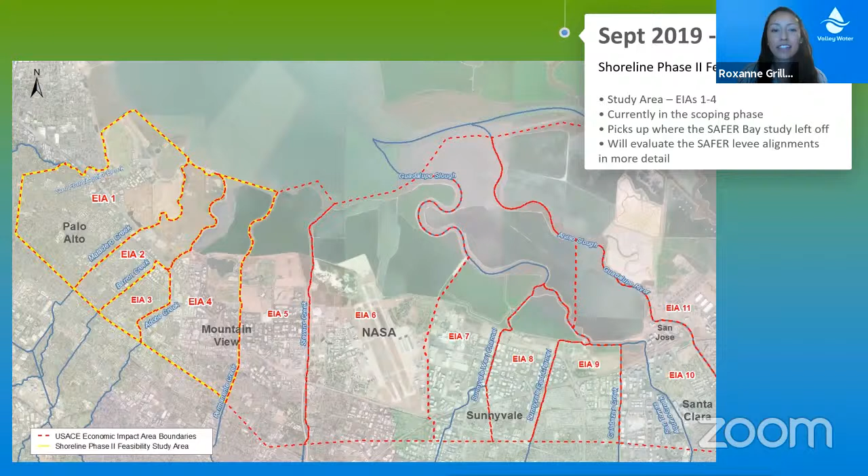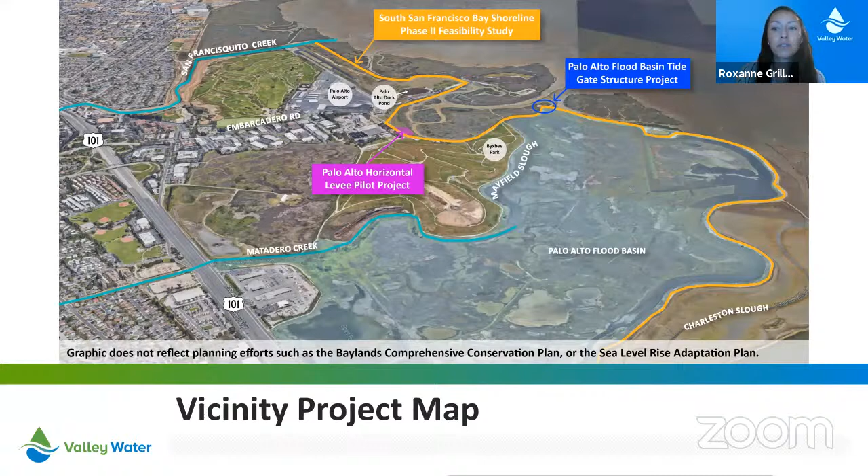So again, this is just to help orient ourselves. The phase 2 feasibility study project area runs along the Palo Alto shoreline north of Highway 101. There are a number of structures and key infrastructure located in this area, including the Palo Alto Airport and the Palo Alto Regional Water Quality Control Plant.

The U.S. Army Corps of Engineers is the federal lead agency of the Shoreline Phase 2 feasibility study. In general, Corps feasibility studies are cost shared with the sponsor. The study non-federal sponsors are Valley Water and the California State Coastal Conservancy. Study sponsors pay 50% of the cost of the study, while the U.S. Army Corps of Engineers pays for the other 50%.

Lastly, the city of Palo Alto is a vital local partner for the study. The city shares its knowledge and experience of the project area, local conditions, and environment and habitat, and design and maintenance issues related to the project alternatives under consideration.

The Shoreline Phase 2 feasibility study is a dual purpose project. The main purposes are to provide coastal storm risk management as well as opportunities for ecosystem restoration.

The specific coastal storm risk management study objectives are to reduce risk to human life, health, and safety caused by coastal flooding and sea level rise, reduce economic damage from coastal flooding to the community, and reduce flood risks in a manner that maintains or improves the ecological function of the baylands by implementing nature-based flood protection solutions.

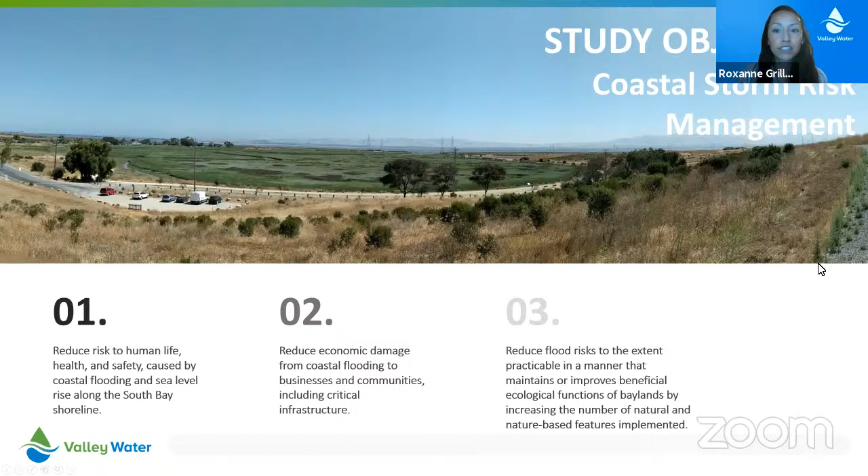The project-specific ecosystem restoration objectives are to restore ecological function and habitat for native plant and animal species, reduce risk to baylands from coastal flooding and sea level rise, and to the extent practicable, implement measures that increase public access to the shoreline. All of the proposed project alternatives for the Shoreline Phase 2 feasibility study should stay within the study constraints listed here.

Specifically, the project should not affect critical infrastructure or increase flood risk. The project should avoid impacts to other restoration projects in the bay and avoid reducing recreational access opportunities.

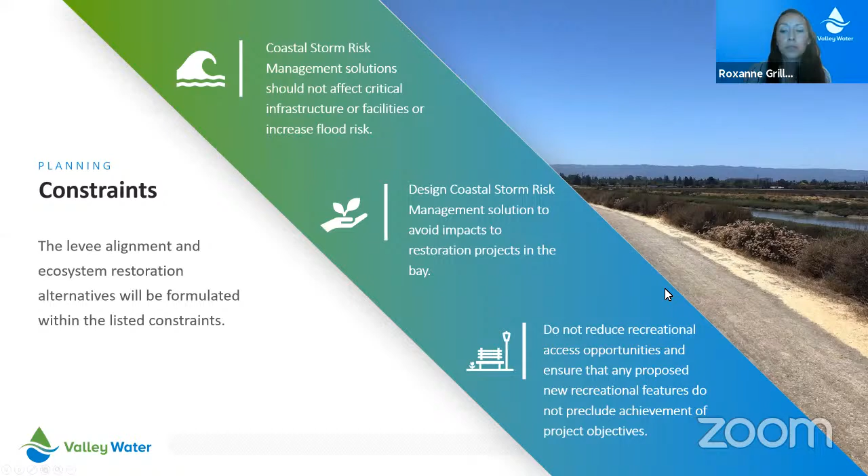Now I want to talk a little bit about the feasibility study process. The Shoreline Phase 2 feasibility study will follow the U.S. Army Corps of Engineers' formal feasibility study process. This chart lists the key study milestones and products that will be produced as a part of this process.

As I already mentioned, the study partners kicked off the project in September of last year. The first Phase 2 feasibility study milestone was the alternatives milestone, achieved in January of this year. During the alternatives milestone, the study partners agreed on the overall objectives and constraints of the study, which I just went over, and they also agreed on the criteria that will be used to evaluate and compare the alternatives to select one recommended plan.

The next upcoming milestone we're looking forward to is the tentatively selected plan milestone, scheduled for spring of 2021. At this milestone, the study partners will agree on one recommended project alternative to move forward with more detailed engineering and cost design.

Between now and the tentatively selected plan milestone, the study partners will develop project alternatives, develop ecosystem restoration options, as well as a bunch of different levee alignments, and then investigate the engineering feasibility, economic justification, and environmental acceptability of these levee alignments and ecosystem restoration alternatives.

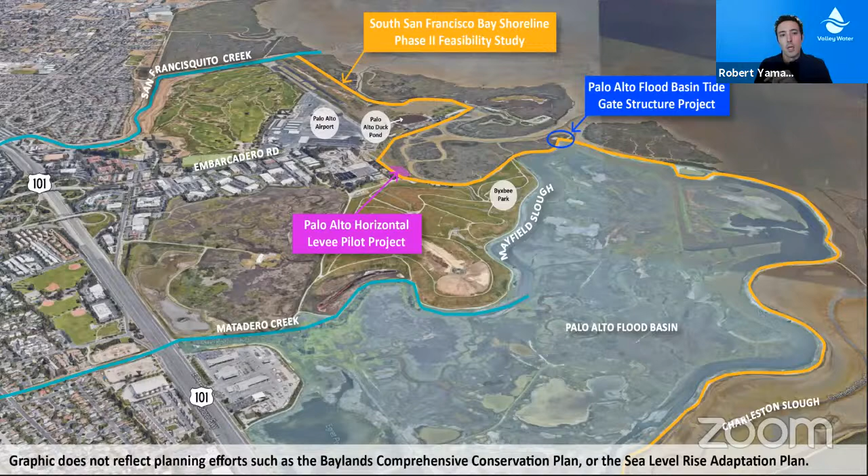So what the Palo Alto flood basin does is it basically provides the storage capacity. It's like a giant bathtub, providing storage capacity for large storm events. So you have a 100-year statistic, 100-year storm event, and it provides the capacity for all the water running through the creeks to store into the Palo Alto flood basin to prevent overtopping of the creeks.

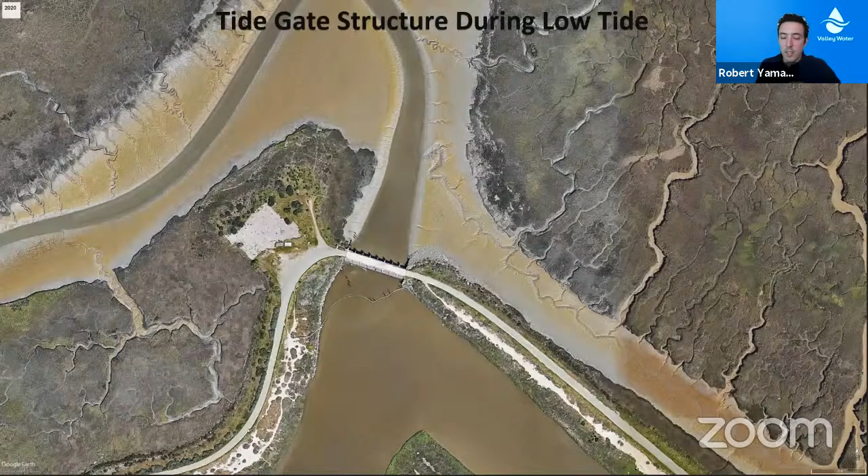Here's an aerial shot just showing you the existing tide gate structure during a high tide, and that same shot during a low tide, and the water level in the basin is the same. This is all taken during the summer, but you can see there's quite a big difference in the sea level between high tide and low tide.

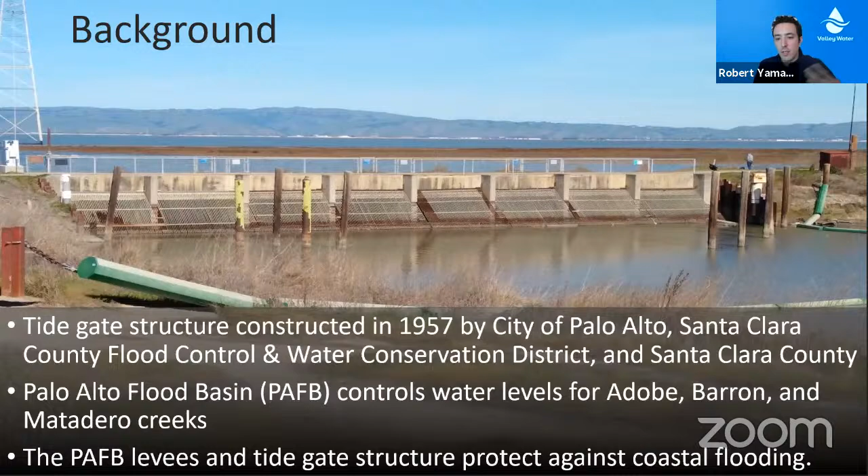Just a quick background: the existing structure was constructed back in 1957 by the City of Palo Alto, the Santa Clara County Flood Control and Water Conservation District, which is now Valley Water, and Santa Clara County. As we talked about, the Palo Alto flood basin controls the starting surface water level elevations for Adobe, Barron, and Matadero Creeks, and the tide gate structure, combined with the levees, provides coastal flood protection.

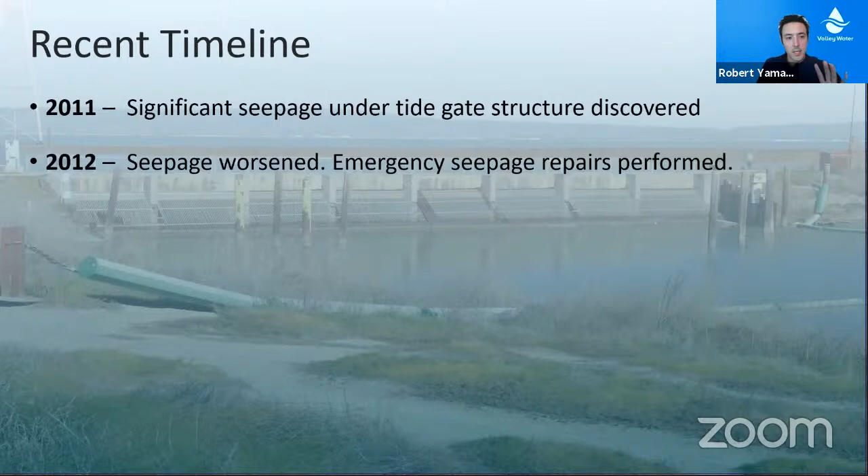A more recent timeline: back in 2011, significant seepage was discovered underneath the structure, and in 2012 that seepage worsened, and Valley Water performed emergency repairs to stop it. Then in 2017, Valley Water attempted concrete repairs to lengthen the service life of the existing structure, but the contractor wasn't able to complete construction because of additional damage found, and they were unable to dewater the work site. Upon further review, it was determined that it's better to replace the structure rather than repair it.

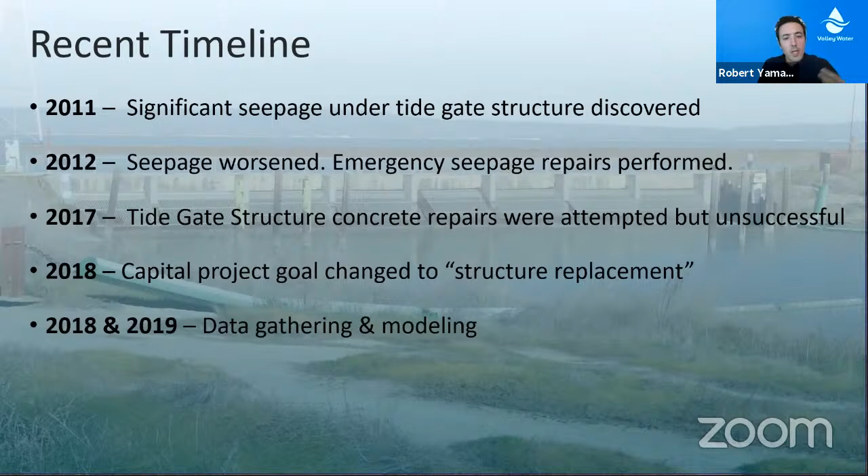So in 2018, the goal changed to a replacement structure, and we've been doing a lot of data gathering and modeling to support this replacement structure. Currently we're ongoing with preliminary design.

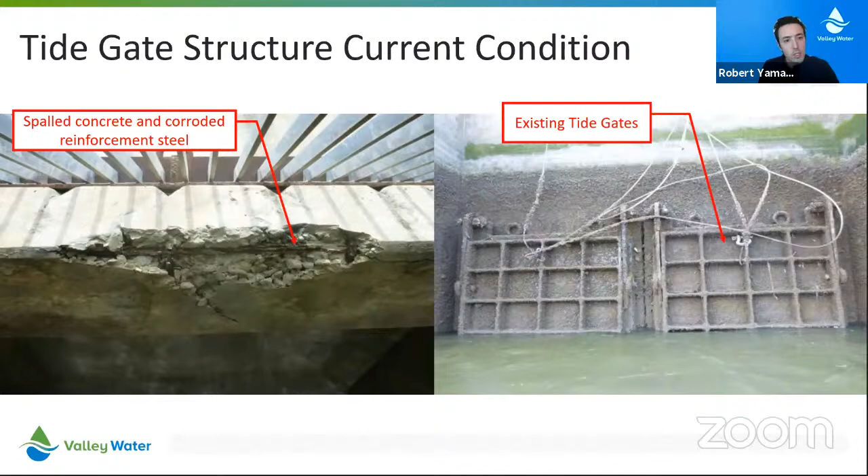Here's some pictures just showing what the existing structure looks like if you were to get underneath and look at it. There's a lot of spalled concrete, exposed rebar, and weathered tide gates. Even on the top, you can see spalled concrete and exposed rebar. It's in a marine environment, and this is kind of typical of the age of this structure, and it's time to be replaced.

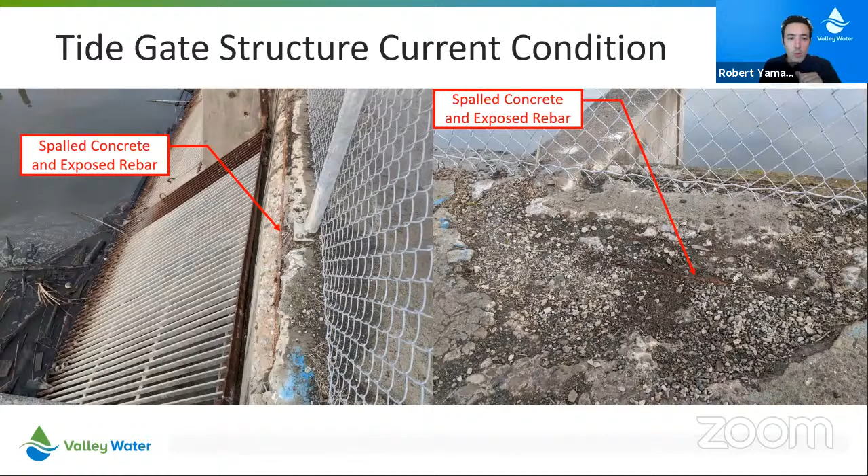So the existing structure is a 63-year-old structure. It's got some structural and hydraulic deficiencies, and maintenance is becoming more and more problematic and costly. It has some seismic vulnerabilities. It's founded on timber piles. There's some potentially liquefiable soils. There's leaky tide gates. As you saw, there's spalled concrete and corroded steel reinforcement.

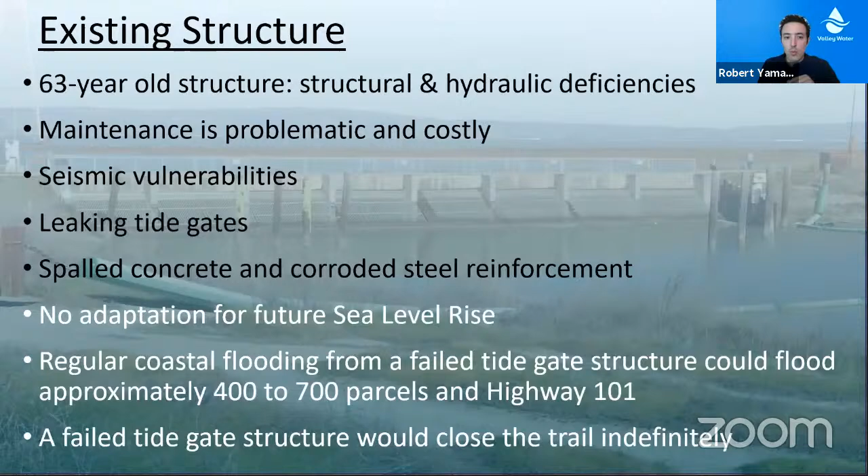There's no adaptation for future sea level rise, and regular coastal flooding from a failed tide gate structure could potentially flood 400 to 700 parcels and Highway 101, and we don't want to let that happen, and that's why we're replacing the structure. Also want to note that a failed tide gate structure would close the trail down indefinitely.

So with the proposed replacement tide gate structure, we'd see continued coastal and creek flood protection, continued protection of the existing basin habitat. Construction's anticipated to take about 4 years, and that construction's only occurring over a 5-month window each year between September 1st and January 31st, to protect the California Ridgway's rail breeding season. It would accommodate roughly 2 feet of future sea level rise, and a temporary trail closure is estimated about 35 months.

Also want to note that the new tide gate structure is going to be about 5 feet higher than the existing structure. And the new tide gates and sluice gate will be more efficient than the existing gates. It'll have improved operations and maintenance, and fewer maintenance required. And the current preliminary cost estimate is around $33 million or more.

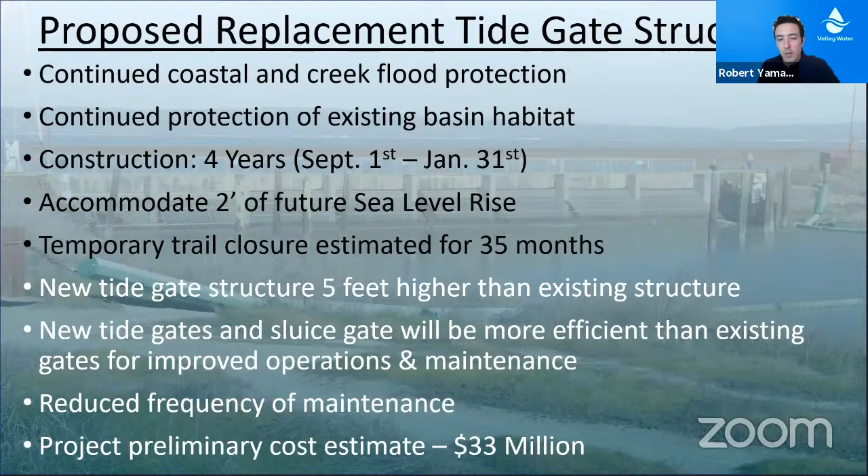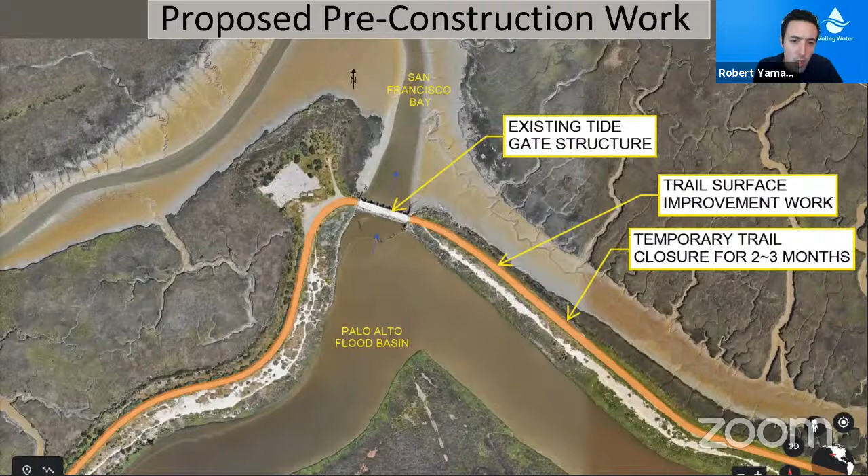These next slides, I'm going to go through a little quick. It just shows the construction staging proposed. And the big takeaway from this is kind of why - just showing the difficulties in constructing this project. We're out here, we've got a sensitive habitat.

You've got the Palo Alto flood basin on one side, you've got the San Francisco Bay on the other. We're out here in the water. Everything has to be dewatered to construct. And most importantly, we're constructing only in a 5-month window where there's also a rainy season involved in there.

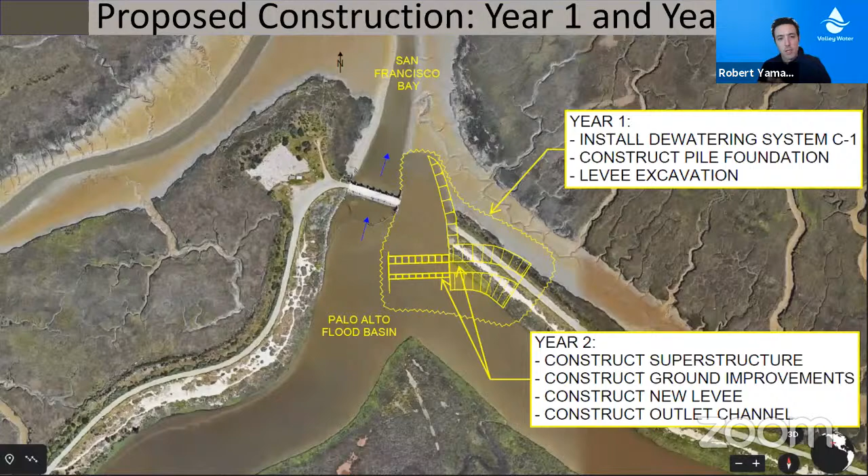The big takeaway here is that we have to construct a new structure first. And then once the new structure is put into service, the existing structure is removed. So there's going to be continued flood protection throughout construction.

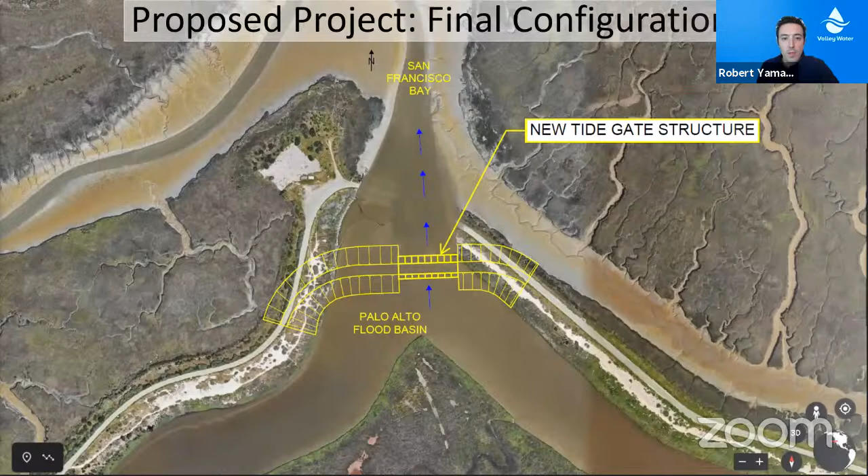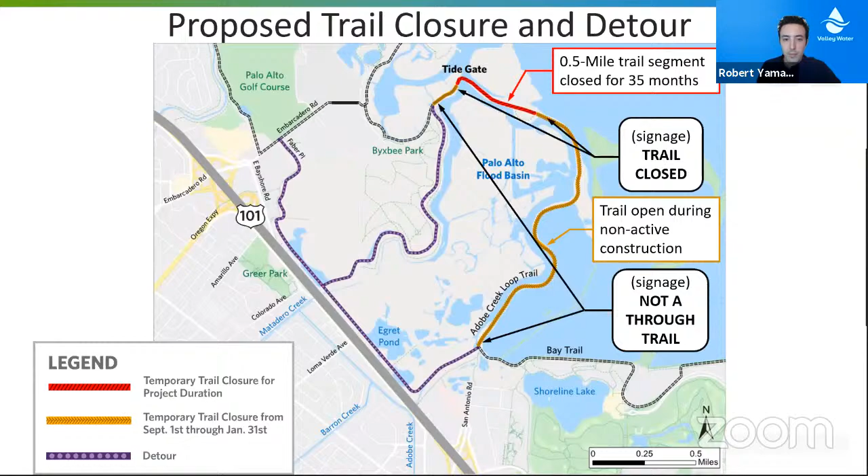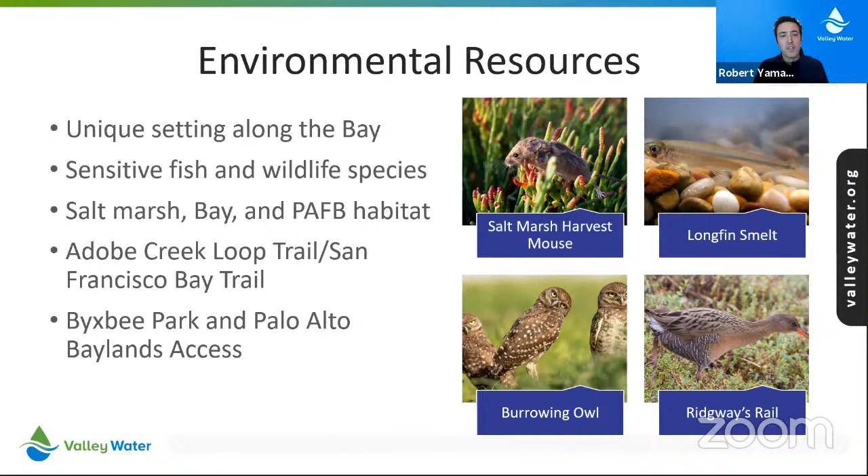We've got Adobe Creek Loop Trail, which is part of the San Francisco Bay Trail. So we've got recreation, Byxbee Park, Palo Alto Baylands access. Many considerations going into the development of this project and part of the permitting and our partnerships with all of our stakeholders. Want to note that our CEQA - first of all, we have every permit under the sun that we're dealing with.

But our CEQA is planned to be a mitigated negative declaration, also known as a CEQA MND. And it's actually probably going to be posted this coming Monday. So I'll get to it where you can sign up to make sure you're notified of where to view that and how to view that.

Right after this slide, just a quick tentative target project schedule. We've just completed the planning phase this summer. The draft CEQA MND will be released for public comment probably on Monday. We anticipate completing 100% design and obtaining environmental permits by summer, fall 2021 next year. There'll be some proposed levee trail surface improvement work also performed later next year, with the main construction for the replacement tide gate structure starting fall 2022 and completed by fall/winter 2025.

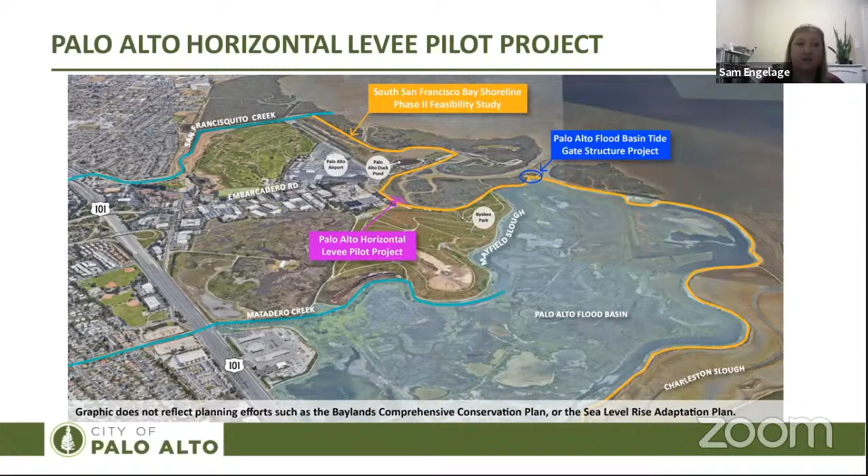Some project drivers have already been covered by Valley Water staff in their earlier presentation, so I'll keep this high level. But the key drivers include the current state of the flood control levees surrounding Palo Alto. Right now they're not engineered to meet FEMA accreditation standards, and we experience overtopping especially when king tide events occur alongside storm events. That's led us to participate in flood control levee improvement projects, namely Safer Bay and the South San Francisco Bay Shoreline project heard previously in the webinar. Those projects enable the city to think outside the box and see if we can include green infrastructure into those larger levee improvement projects. That's where this project fits in.

Another project driver includes the acknowledgement from many resource agencies statewide that transition zones between terrestrial and tidal habitats are severely constrained and developed, specifically by the steep artificial faces of traditional levees. This is Bay-wide, not a Palo Alto specific concern. That acknowledgement that these transition zones are constrained and in need of additional restoration has made them a priority for resource agencies. Because of that, agencies like Palo Alto can apply grant funding toward interesting, slightly novel green infrastructure projects to incorporate more green infrastructure into flood control levee improvement projects, while helping resource agencies restore these transition zones.

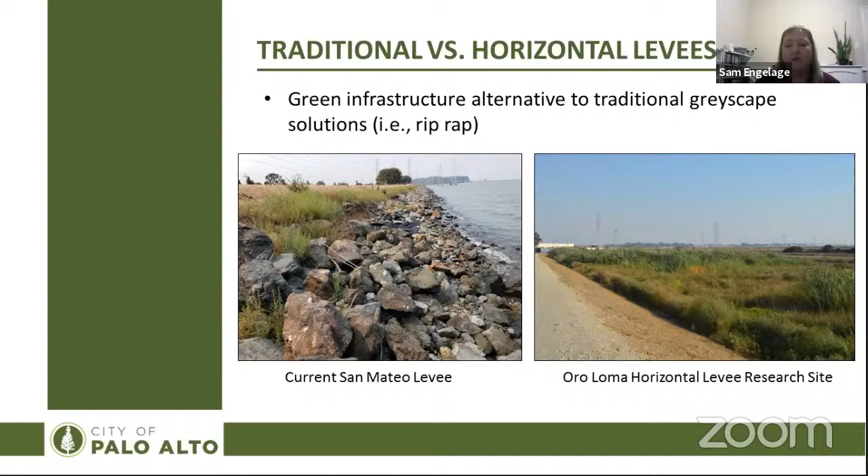So backing up, riprap is really important for attenuating wave energy and ensuring the stability of your flood control levee system, but as you can see it doesn't offer much habitat benefit. Whereas horizontal levees can provide that same wave attenuation as riprap, but also include numerous additional benefits beyond wave attenuation.

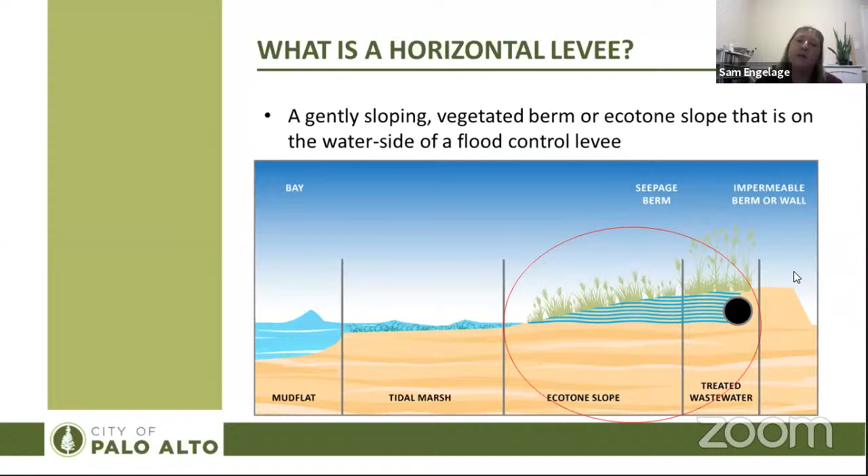Horizontal levees include numerous benefits above and beyond just the wave attenuation that riprap provides. That includes habitat enhancement, sea level rise adaptation, and wastewater polishing treatment.

For habitat enhancement, horizontal levees can provide that transitional habitat between terrestrial and tidal marsh I mentioned previously. That's a restoration priority for numerous resource agencies. That habitat also provides high tide refugia for endangered species such as the salt marsh harvest mouse, and it helps recreate the historic freshwater seep that is missing in our system now.

Those historic freshwater seeps have mostly been channelized into flood control channels or creeks to protect us further from flood issues. For sea level rise adaptation, horizontal levees provide wave attenuation similar to riprap.

In addition, horizontal levee systems will accrete and accumulate sediment over time, such that ground level elevations increase over time. This can enable marshes to migrate upland in the case of rising seas. If a horizontal levee system is not installed, tidal marshes risk being overtaken by the seas and becoming open water as seas rise. If we install horizontal levees, that elevated ground surface will enable marshes to migrate upland and maintain that tidal marsh habitat and ecosystem that's so valuable in the Bay Area.

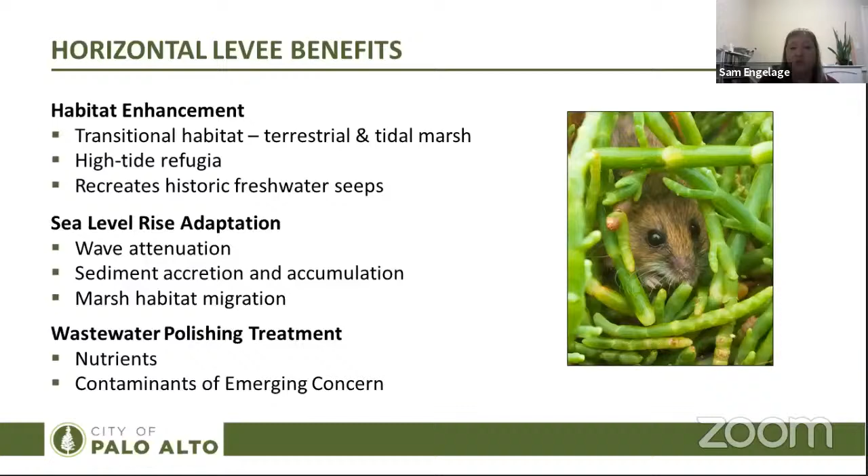Because of that, a horizontal levee is not going to be used for any permit compliance—we already meet our permit limits, we're really good at that. So the horizontal levee would provide an additional level of treatment, bonus treatment to that treated wastewater, namely looking at removing additional nutrients and contaminants of emerging concern.

With all of those great benefits in mind, the key goals of the Palo Alto Horizontal Levee Pilot Project are pretty specific. We want to collect information on permitting and implementation of a small-scale horizontal levee within the Palo Alto Baylands, and specifically extend the knowledge we've learned from the Oro Loma Horizontal Levee Research Site to now include tidal action.

The Oro Loma Horizontal Levee Research Site is a great project and a great horizontal levee, but it is a research site—it's actually a closed loop. There is no connection to the horizontal levee at Oro Loma with tidal action. So this project, the Palo Alto Horizontal Levee Pilot Project, would provide key information on tidal interactions between the system and the tides.

We're looking to get information on plant palette, irrigation regimes, and all the great design specifications needed to take these systems full scale and regionally, if others are looking to apply this system. With that in mind, we're hoping to take that information and integrate it into design elements for the larger flood control levee improvement projects, specifically for Palo Alto—those are the Safer Bay project and the South San Francisco Bay Shoreline study that we heard about previously from Valley Water staff.

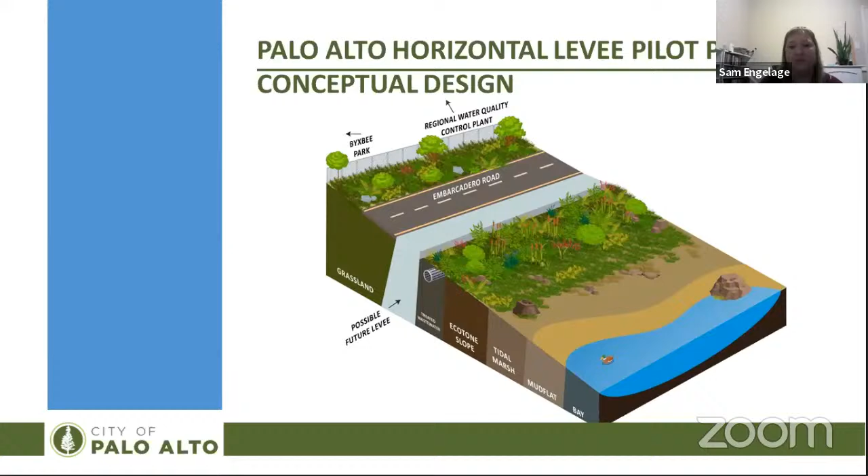Followed shortly by the horizontal levee in the green, pretty vegetated area, we would take treated wastewater and pipe it over to the system to provide the fresh water needed to create grassy wet meadows, brackish marsh, and riparian scrub within this ecotone slope area. That would then transition into tidal marsh, mudflat, and then the bay. So the horizontal levee component is really just that green part there, and then we connect it to the existing conditions out in the field for the tidal marsh and mudflat.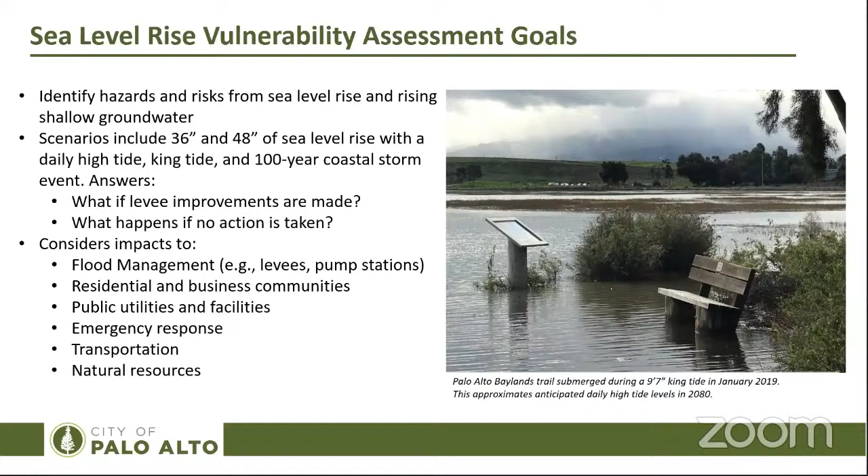So as a reminder, the sea level rise adaptation plan that we're developing will be a chapter in our city's sustainability and climate action plan, and that is a council priority.

One of the main goals that we have for all of this is to make sure that we as city staff are all singing off the same sheet of music, and we have clear technical assumptions and tools that we're using across city departments that we can implement so that we are all doing our respective jobs to make sure sea level rise stays on our radar, and we are doing what we can to plan and respond to that.

We also want to make sure that we are partnering properly with our neighbors on either side of our border and also our regional planning efforts so that we are in sync with each other and not hindering each other's efforts.

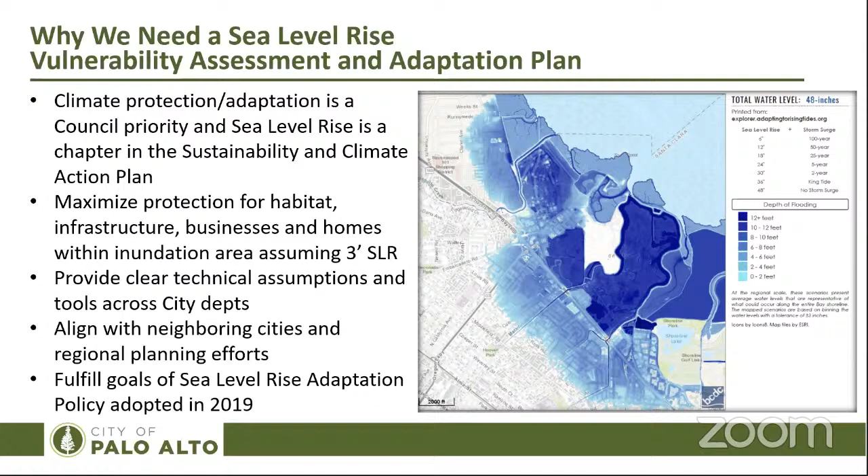So a lot of people want to know, well, what would actually be in a sea level rise adaptation plan? Well, it would for sure include a menu of adaptation strategies, a number of things that we could do to solve problems, and we're probably going to have more than one solution to a number of the problems that we develop solutions for. So we need to have evaluation criteria to look at the benefits and the trade-offs and look at that through a sustainability lens. What happens if we pick options in terms of social and environmental impacts and of course costs as well.

The other thing that we need to bring into our vocabulary is this idea of adaptation pathways. It's not just about a one-time fix, but we need to design our fixes so that they can be adaptable over time as sea level rise continues to increase.

Part of thinking about adaptation pathways is to know, well, what conditions trigger action so that we have our solutions in place in time for when the scenario that we're trying to address actually arrives. So, you know, some of these projects can take years to get in place with design and review and funding, let alone construction. So we need to know what those triggers are so we start work in time.

Our sea level rise adaptation plan will be updated every 5 years to align with the Ocean Protection Council.